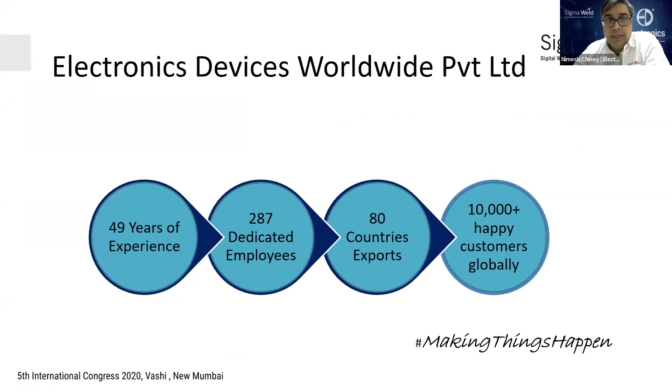I'll just give a little brief about Electronic Devices. We have 49 years of experience, 287 dedicated employees, with exports to more than 80 countries and 10,000 plus happy customers globally. With the motto of making things happen for our customers, we have our products categorized as induction heating, induction sealing, and welding and related automation.

Let's quickly get into the processes that are commonly used. I believe today's topic is more focused on infrastructure. In infrastructure, we use a lot of arc welding applications, MIG-MAG, and submerged arc welding. There are also new developments in laser welding, friction stir welding, plasma arc, PTA, and strip cladding, but these we will not be touching on today.

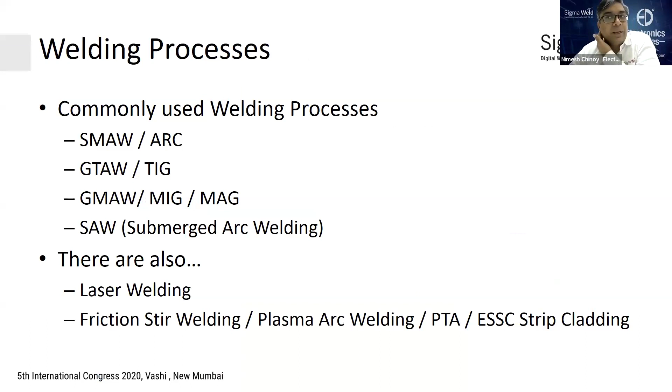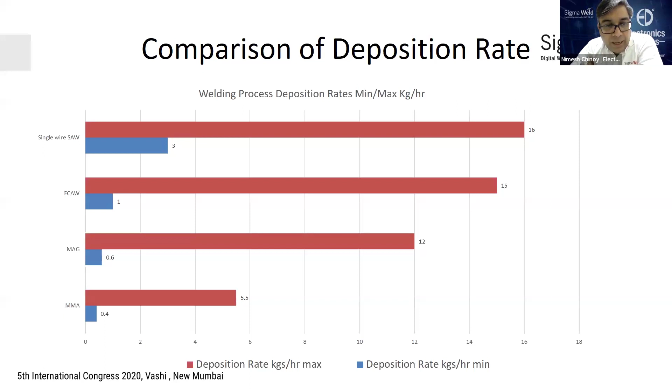If we quickly look at the deposition comparison of deposition rates for different processes, the highest among the standard processes is single wire submerged arc, ranging from 3 kgs per hour to about 16 kgs per hour. Flux core wire welding is 1 kg per hour to 15 kgs per hour. MIG-MAG goes from 600 grams per hour to about 12 kgs an hour. Arc welding, the most traditionally used, starts from 0.4, or 400 grams, to 5.5 kgs an hour. The most commonly used process is still arc welding even today in India and mostly globally as well.

If you want to increase productivity and efficiency in these equipments, you need man, machine, and consumable, all three to be improved. If you look at the man, arc welding needs a welder - it is rarely an automated process. It's a non-automated process. For slag removal and spatters, you need chipping and grinding.

You can improve this by upgrading to inverter-based machines from the traditional machines such as transformers and rectifiers. This will help reduce spatters and make cleaner slag removal. Also, energy saving is a bonus - you save close to about 30 to 60% energy if you move to inverter-based from the traditional equipment.

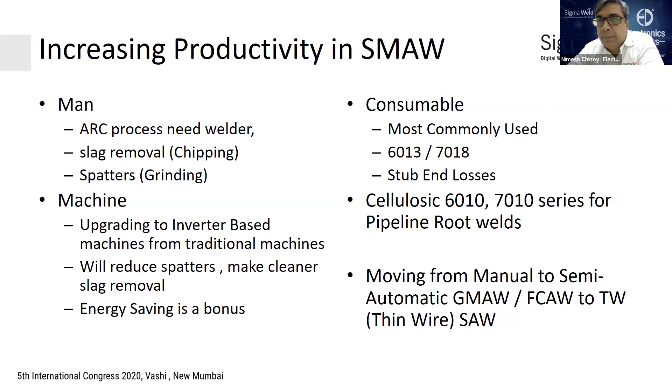Most commonly used electrodes are 6013, 7018, and for pipeline root welds, they use cellulosic electrodes such as 6010, 7010. If you're using arc welding, you can move over from manual to semi-automatic MIG-MAG, flux core wire, or thin wire SAW to increase your productivity and efficiency.

If you move from arc welding to MIG-MAG welding, the bottom first three electrodes - 7018, 6010, and low hydrogen - have deposit rates between 0.65 to 1.18 kgs. If you move upwards towards semi-automatic flux core welding and all the way up to automated MIG-MAG dual torch, you can go up to 7.5 kgs per hour. That's the progression depending on the job and your level of automation.

You can easily go from 600 grams to at least a semi-automatic flux core welding of about 2 kgs an hour, or a mechanized trolley to take it up to 2.5 kgs an hour.

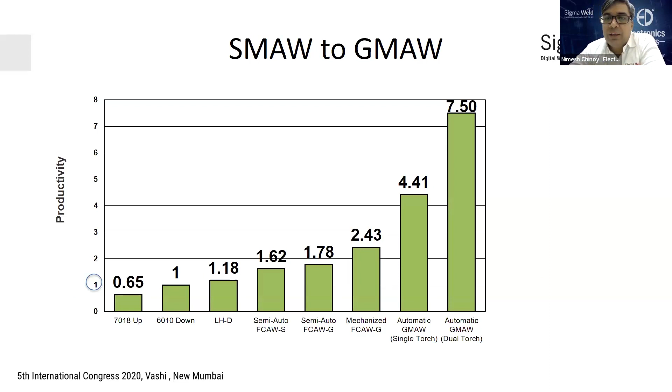When you move from arc to flux core, keep in mind you're moving from a manual process to a mechanized process. Your investment cost will be slightly higher compared to arc welding, but your metal recovery will be very high - that means per kg you pay, you will have more deposits, no stub losses. You can use gas-based or self-shielded wires, and it will mainly be used for filler and capping runs, whereas the basic root runs may still be done with arc welding or TIG welding.

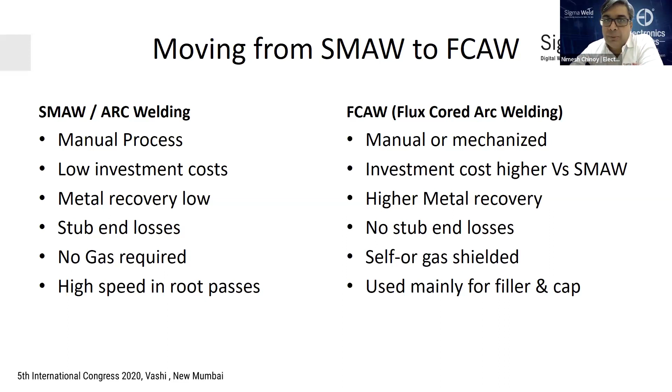That means less amount of material, more amount of throughput. So you can increase your ROI by 2.5 times, because the process is that much faster, with more metal per kg and per hour deposited, and the process can be easily mechanized. This is what an arc welding or flux core MIG welding machine looks like.

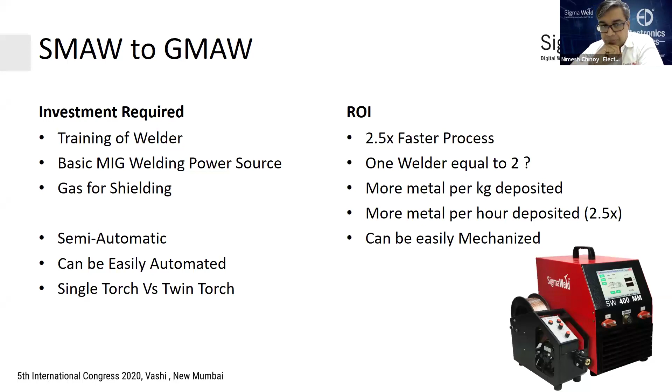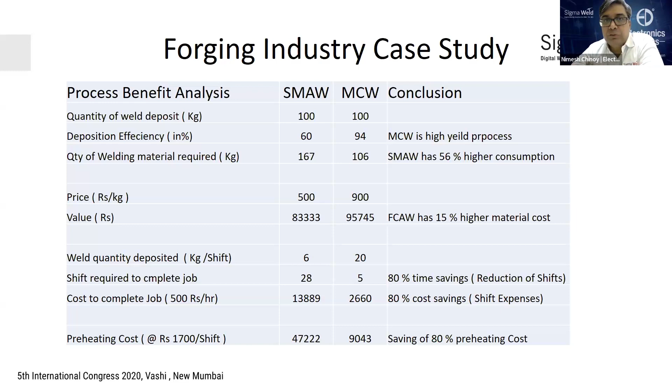You can go for single or twin wire, both. Just a comparison: per kg, you can see about 80% of preheating cost can be saved. And if you look at using metal cored wires, about 80% of time and cost saving happens. These are different figures used for the forging industry and die casting applications.

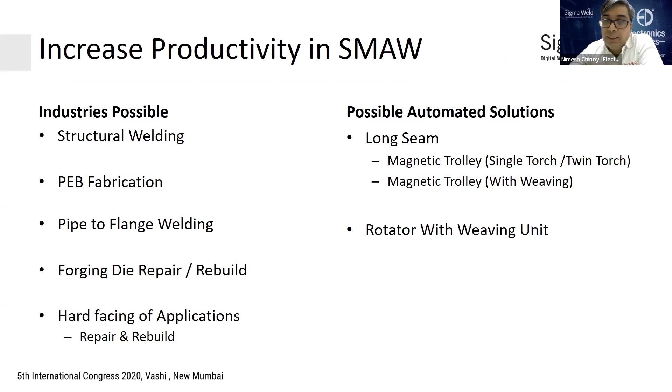If you wanted to increase productivity in arc welding, it is possible to do structural welding, PEB fabrication, pipe to flange, forging die repair, and hard facing applications. You can automate them by moving to MIG-MAG or flux core wires using magnetic trolleys and weaving units.

If you move from arc welding to thin wire submerged arc, you could increase your productivity very fast. This is very effective for low thickness, 5 to 15 millimeters, which is largely used in the infra sector for PEBs, girders and bridges. Speeds up to 7.5 times arc welding can be increased, and it's an already established procedure used in PEB, pre-engineered building applications of 10 to 12 mm thickness, and also in pressure vessels for fill and capping passes up to 5 to 10 millimeters.

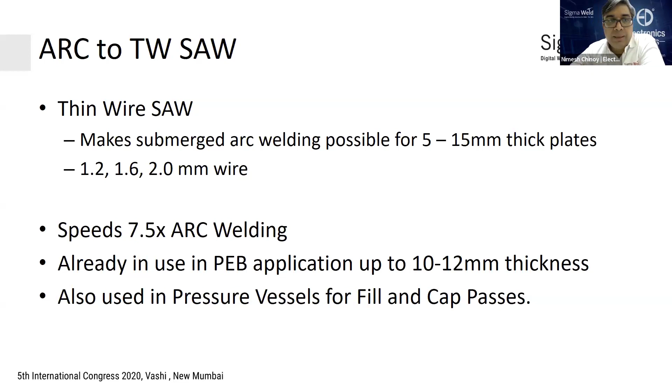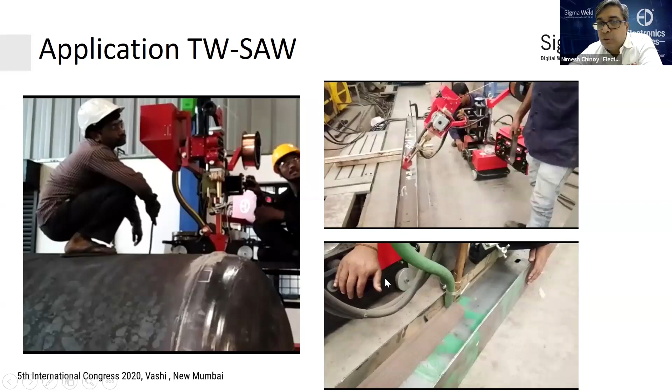Just a couple of photos and videos to show you how it looks. This is a 6 mm pressure vessel being welded using thin wire SAW. Here you can see small girders and flanges being made using thin wire SAW. The wire sizes are between 1.2 to 1.6, with specialized storages to reduce setup time.

SMAW productivity improvement, we've already discussed. From thin wire, your productivity increases 7.5 times, and it's very good for low thickness up to 15 mm plates.

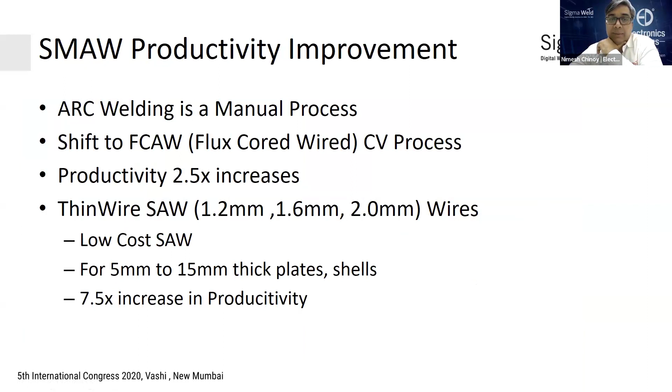Most popular process is MIG-MAG or GMAW welding, gas metal arc welding. It's widely used, extensively used in the automotive and heavy fabrication sectors. The advantages are very high speed, it can be easily automated, higher metal recovery, no stub-end losses. You can use self-shielded or gas-shielded wires, and you can also have narrow gap preparations.

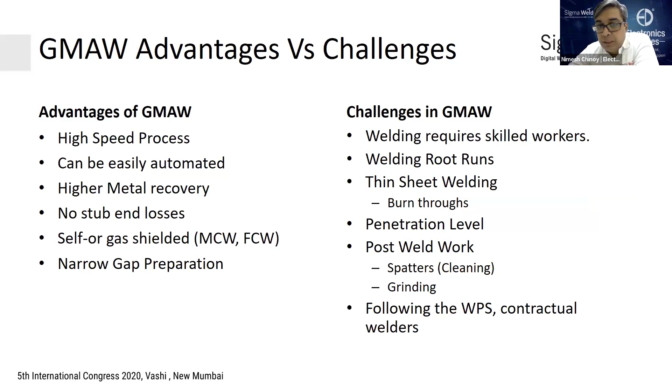Although the challenges, as also shared by Dr. Satish Sawant, are that it requires a lot of skilled welders, and availability of skilled workers is a challenge. Welding root runs are not permissible in pressure vessels using this process. Thin sheet welding can cause burn-throughs. Penetration levels need to be cross-verified, and post-weld spatter cleaning and grinding can be higher. Following WPS by contractual welders can always be a question mark.

To improve productivity, we can use high-end power sources, which are synergic, pulsed, and advanced, with 100% duty cycle. They're modular in nature and can give you inbuilt intelligence, IoT, etc. They're easier to train welders with, and low-skilled welders can perform better. More arcing hours per shift can be achieved if you move to high-end power sources.

Simpler automation such as rotators, headstock, tailstock, and semi-automatic parts can be welded using these. Long seamers are used with motorized slides and trolleys so that you can do smaller shells. As we saw, the flanges and girders can be welded with them.

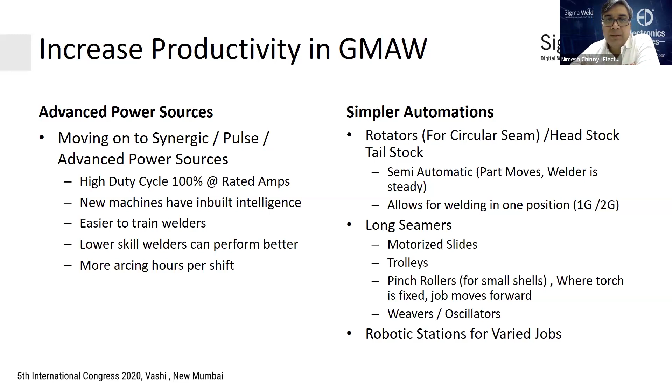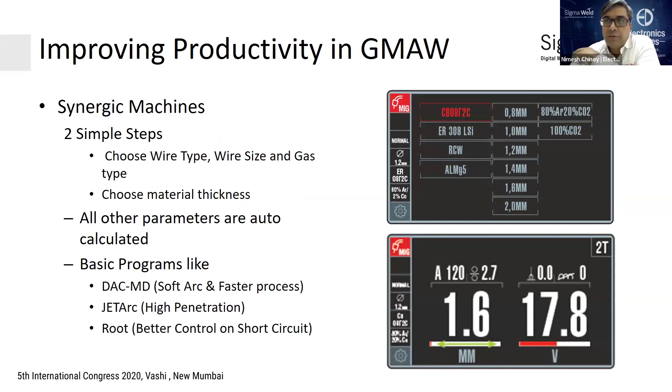Synergic machines have two basic steps. You can choose the material, the wire size, and the gas, and it will calculate all the other parameters for you, thereby taking away the skill from the welder and putting it right back into the equipment. You can have basic programs such as soft arc or faster process, which we call DAC-MD in the Pro series that Sigma Weld has. You have JETArc for very high penetration, and root for better short circuit control. We'll see a little more on that.

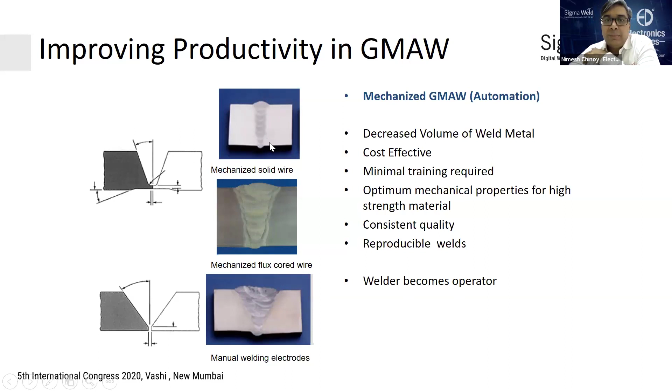If you look at this mechanized GMAW process, this is for a manual one - many passes, not very clean, you have to clean after each pass. If you go for mechanized flux cored wire, with a narrower groove, lesser material to be deposited, and fully mechanized, you can see the number of passes is reduced drastically - less passes, more weld deposit, and lesser cost overall.

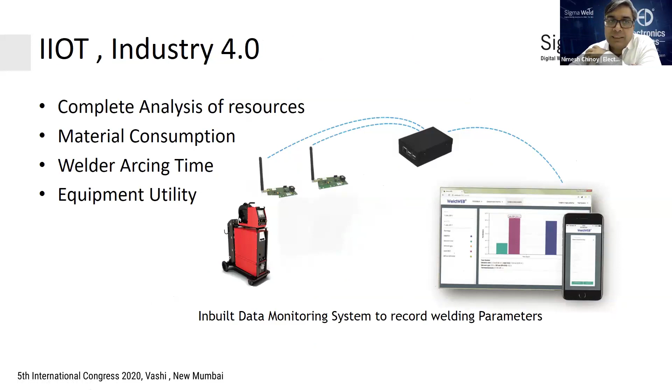Of course, there's a different talk altogether on IIoT and Industry 4.0 and how it can help you, but that's today a norm. We call it Weld Web, and we can give you a lot of analysis of data on that, which shows the productivity, efficiency, and consumption of resources utilized on the shop floor.

Root welding can also now be done with MIG welding instead of arc welding.

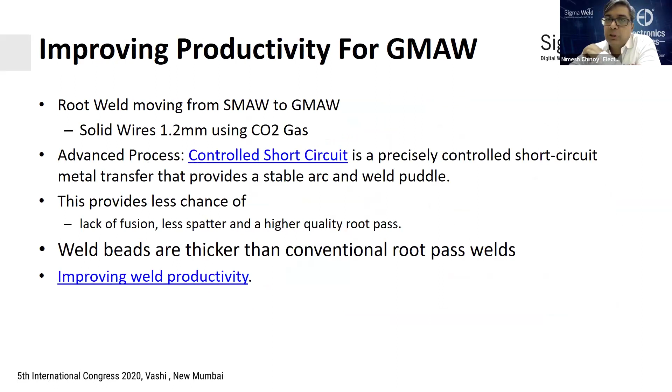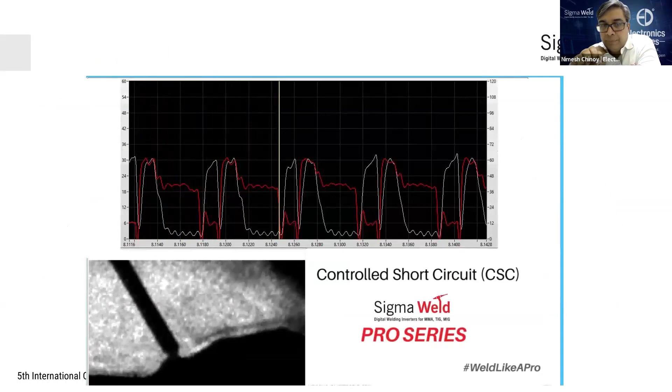This can help you with a lot of speed improvement. This is a proprietary software which allows you to have very high controlled short circuit. You can see the waveform and the deposit of the wire breaking is very smooth, with no spatters. Just a quick video to show you how this looks in real time.

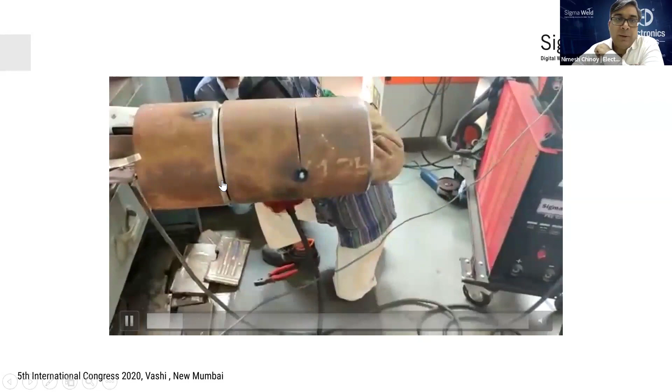This is a pipe with the root weld being welded by the welder. You can see the root gap is larger and the welder is directly welding the root through this process. This process has now been accepted in the pipeline industry and it saves a lot of time.

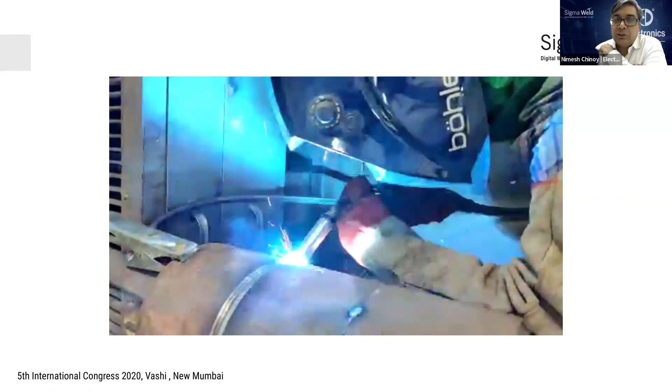It's ideally suited for root welding, consistent sidewall fusion, lesser weld spatters, tolerance to fit up conditions, also more tolerant to changes in stick out and tip to work distance, and the machine automatically accommodates for it. Lesser time to train personnel and thicker root passes to eliminate the hot pass.

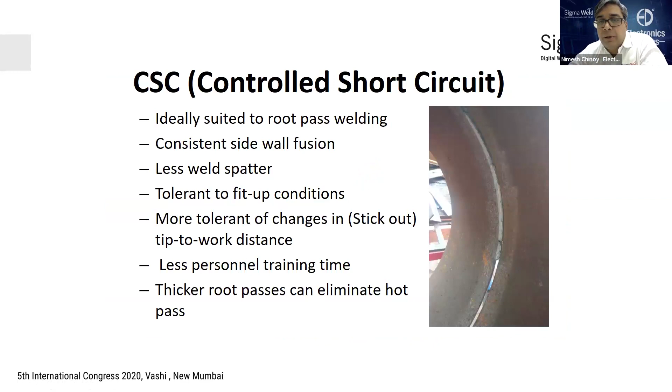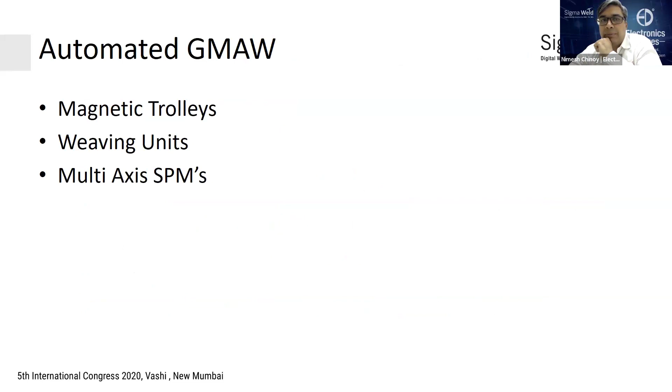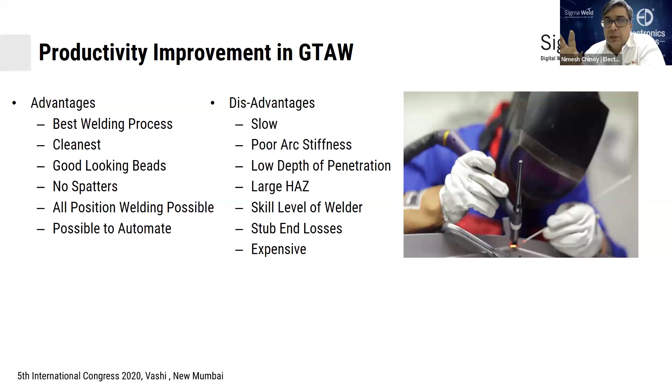However, it comes with inherent disadvantages of being slow, having poor arc stiffness, low depth of penetration, higher heat affected zone, and of course you need skilled welders. It can result in stub end losses. Due to all this, it's considered to be an expensive process.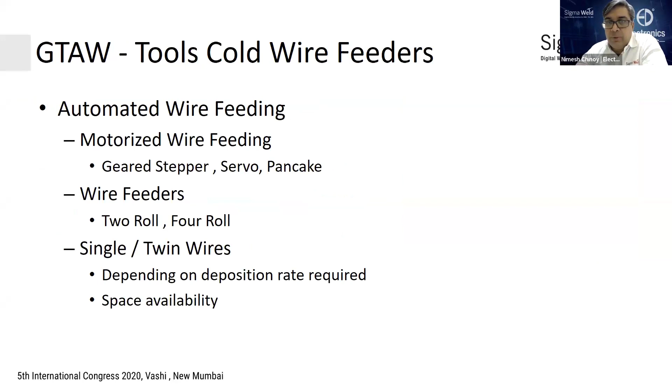However, there are tools that help you make this easier. You can go in for cold wire feeders, which are single wire or twin wire. They look something like this. They use a full spool. So you have 10% saving on material costs because you have that much less stub end losses.

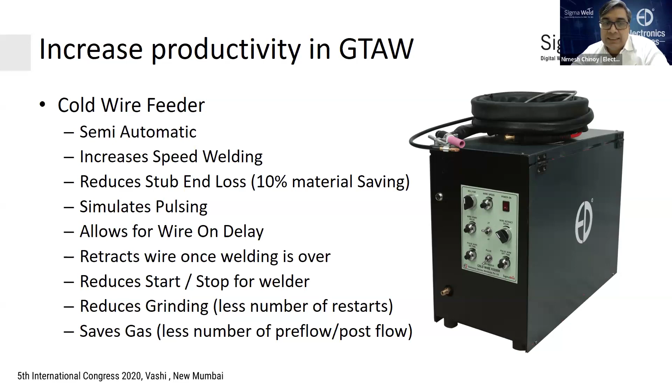You can increase your weld speed by up to 30 to 40%. And it allows a lot of - because there are less number of start stops, the number of grinding reduces, the amount of gas consumption reduces, and the operator convenience is much higher. The same operator can produce close to about 30 to 40% more speed.

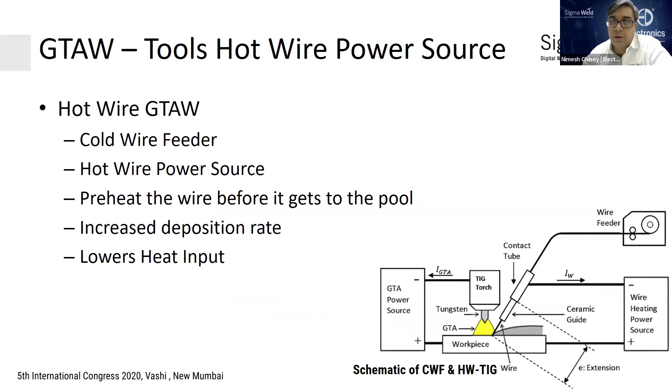You can even preheat the wire before welding - that's called hot wire TIG. And that can even help you with a lot of speed increase in semi-automatic as well as fully automatic solutions.

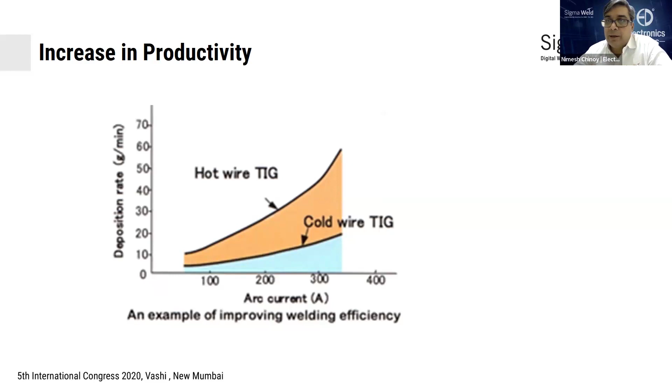Comparatively, the productivity that you can get with cold wire or hot wire - typically if you take a 200 ampere range, you're doing about 10 grams per minute, or about 600 grams per hour with cold wire. The same hot wire can give you close to about 1.8 kgs at the same current levels. So there's an increase in productivity while keeping the currents low.

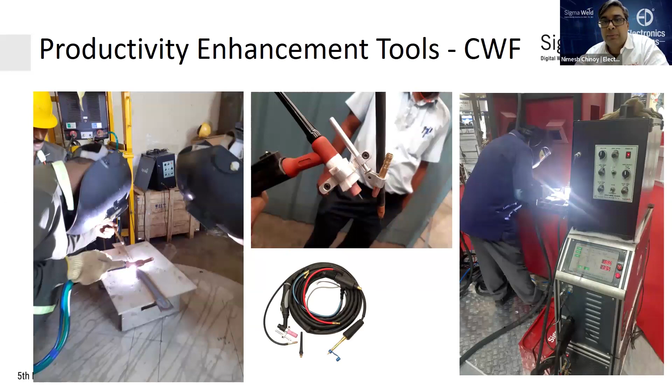You need not invest in a newer setup. It can be integrated with any old equipment, whether it's European, Indian, or an old machine - it can do the work. Here you can see the productivity improvement is close to 25% and time taken is reduced by about 27%.

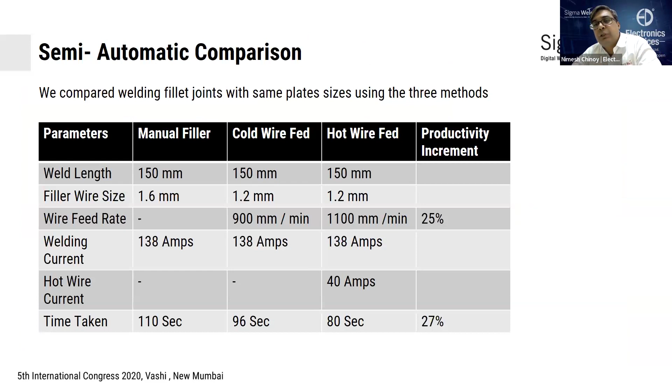You can also use twin wire, but this is usually used in automated setups. In those cases, if you use twin wire with hot wire power sources, you get 150% improvement in deposit rate.

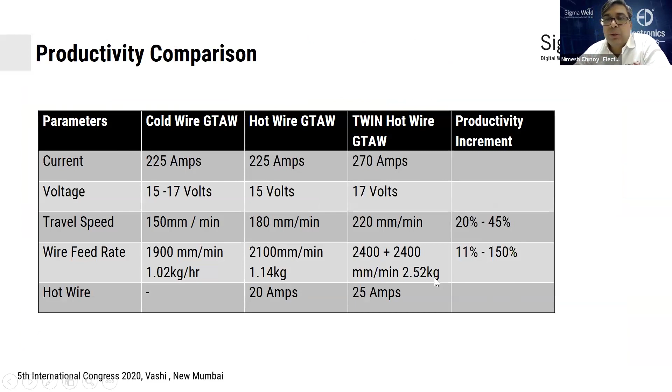This is something that you can use. It's largely used in cladding applications where a lot of material has to be deposited.

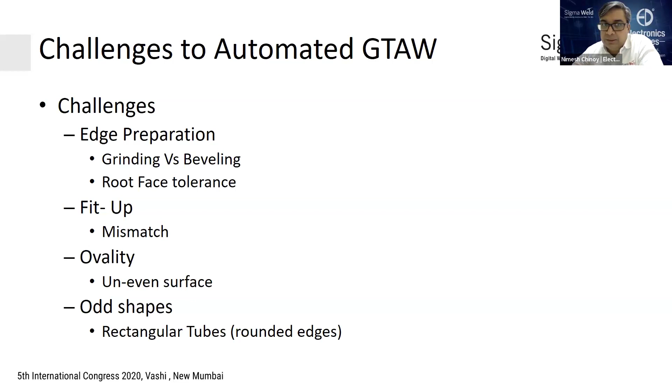Challenges to automate TIG welding include edge preparation issues, grinding versus beveling, root face tolerances, mismatch in fit ups, ovality, and odd shapes. These can be taken care of by using different kinds of weaving and oscillators, angular or straight.

Some videos, but I'll play them later.

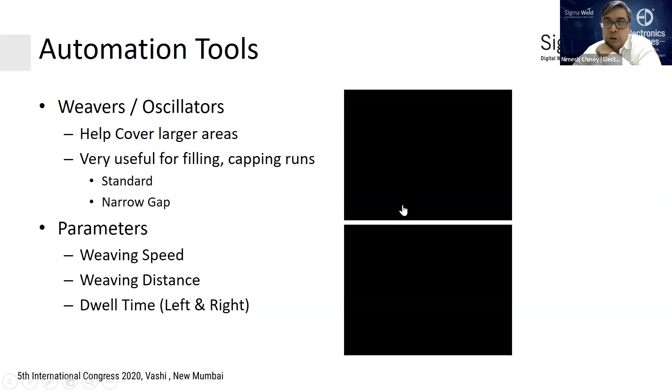You can also adjust the weaving speed, the dwell time on each end to avoid lack of fusion, and you can set the weaving distances.

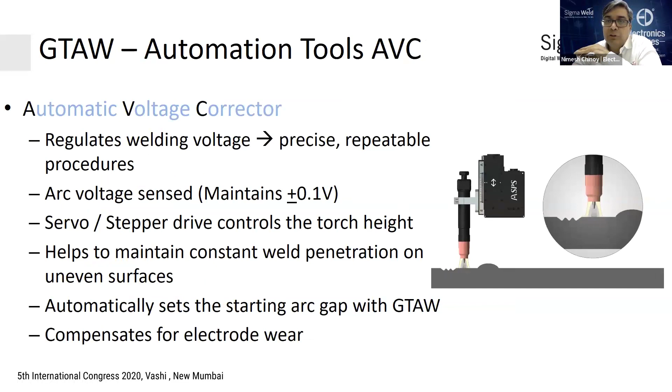Similarly, you can use something called an AVC, or automatic voltage corrector, which follows the path by controlling the voltage, and it allows you to have very clear results - irregular shapes can be managed by this as well.

Few examples of welding automation: you can do pipe to flange, pipe to pipe, long seam, stud seams, ID/OD welding. It's all possible if you mix these three together - cold wire feeder, hot wire feeder, AVC, and weaving. Multiple combinations can be done based on your exact requirement.

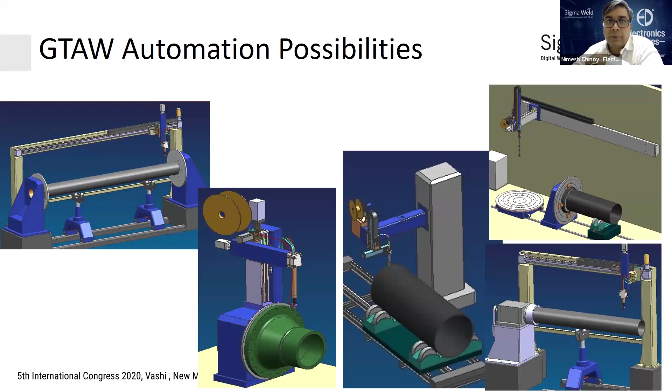Some of the examples you can see - the leftmost is an 8 millimeter pipe to pipe joint reduced to 2 passes. Here in the middle you can see large spooling which has been done. And on the right, we are proud to say this is the Chandrayaan 2, Chandrayaan 1, and Chandrayaan 3 outer solid fuel boosters which have been welded on a SigmaWeld setup.

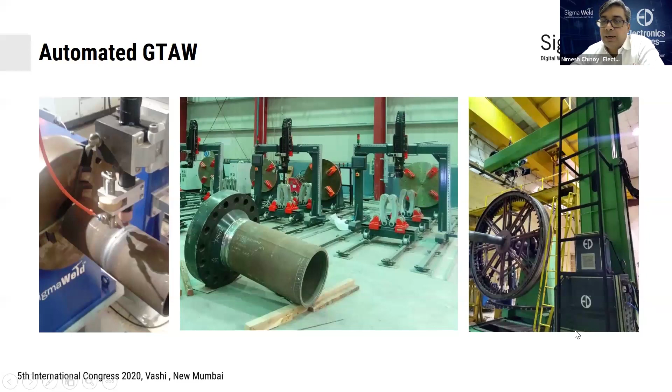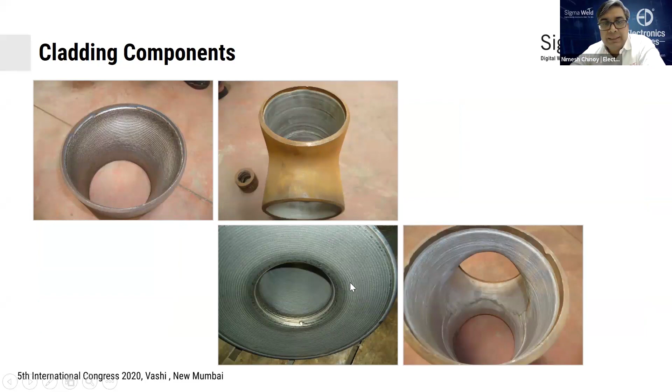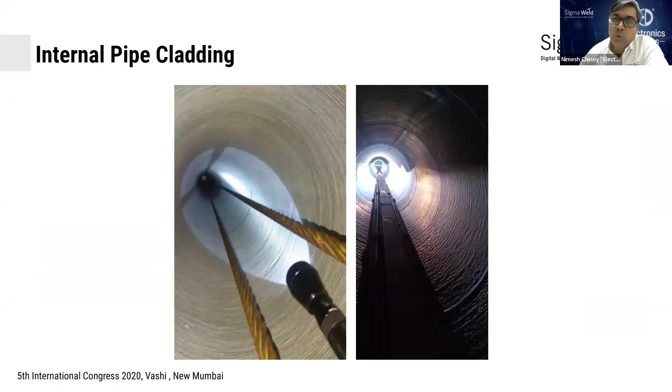Cladding components - if you had to overlay a component for oil and gas, you need to add Inconel, Monel, stainless steel, over carbon steel. These can be done in automated solutions using auto TIG, reducing a lot of time and giving you very good quality. These are 12-meter long pipes done with single head, twin head, or quad heads together. Again, TIG welding, very consistent deposit, and high productivity rates. There are a lot more examples for automated TIG welding, but if there's any specific one you need, we can discuss that.

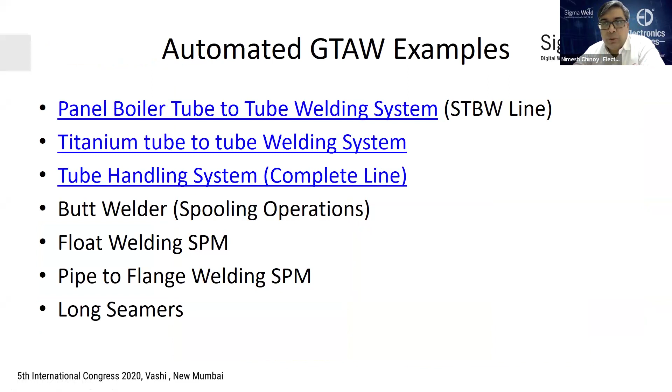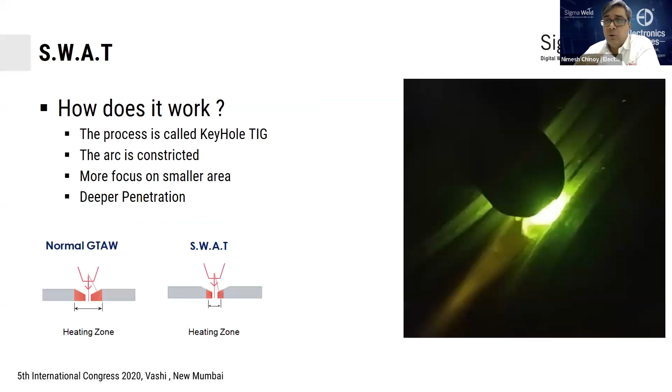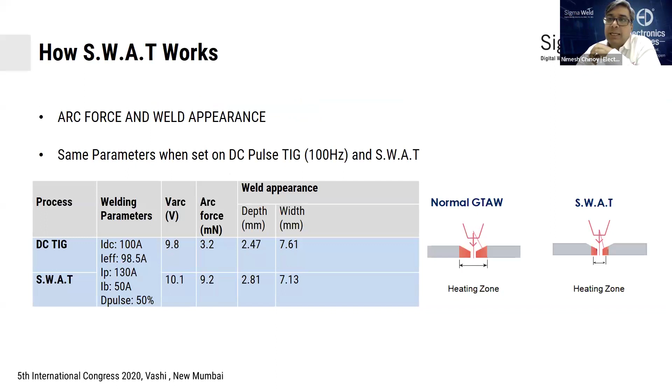Speeding up TIG to a different level, where you call it SWAT - Sigma Weld Accelerated TIG - wherein we create a keyhole, narrow the arc, and go deeper. The arc force, when you narrow the arc, is so high it's almost 3 times the regular TIG welding arc force. This allows for more than 20% more penetration.

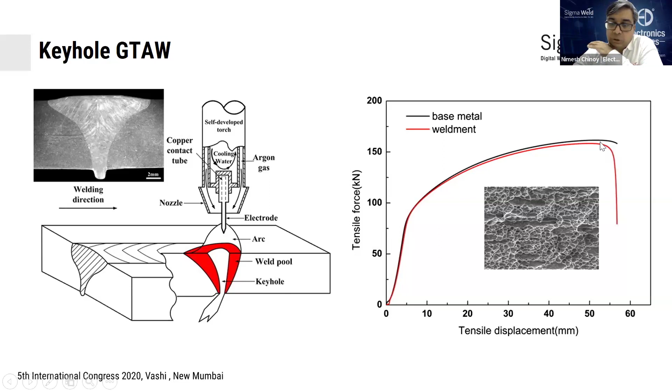You can have square butt welds up to 10 to 12 millimeters for materials such as stainless steel, low alloy steel, titanium, Hastelloy, difficult to weld alloys - you can do all of them. And since you don't use any filler wire, the base metal and the weldment have almost the same tensile strength. So very good welding quality, very high speed possibilities. It can be used for long seam, circular seam applications, and tube mill applications.

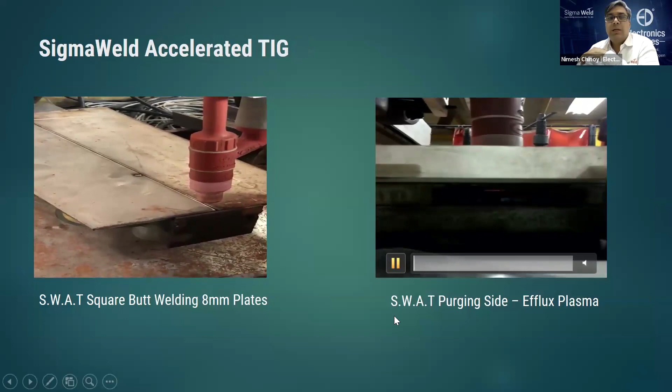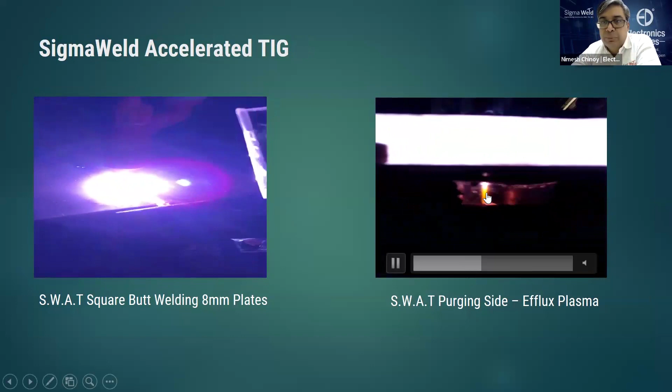So this is how it looks - basically you can see a square edge preparation, there is no V shape done. It's a regular TIG torch, but it's going to be mounted onto the SWAT mode. It will punch through the entire system in one go. You can see the efflux plasma exiting from the other end, which means there's a clean 100% penetration joint. And the welding speeds are upward of 400 millimeters a minute.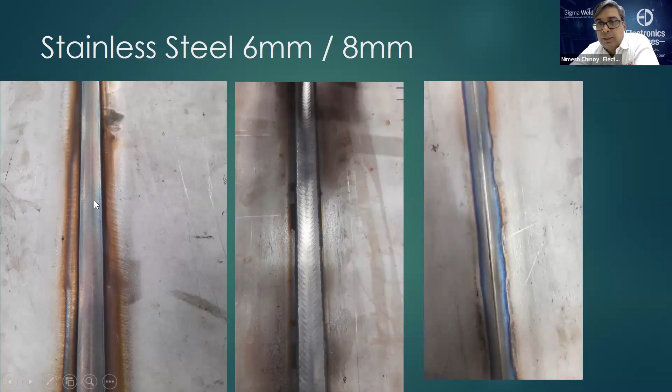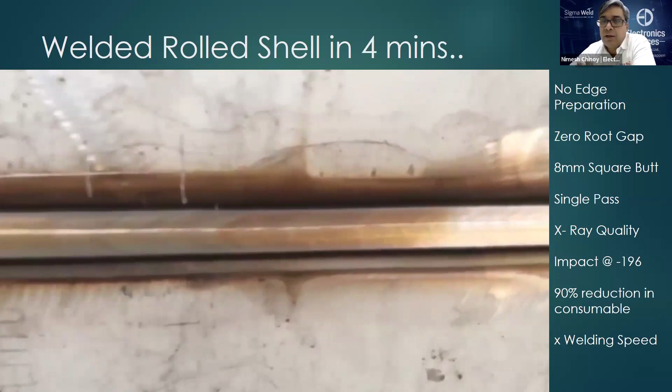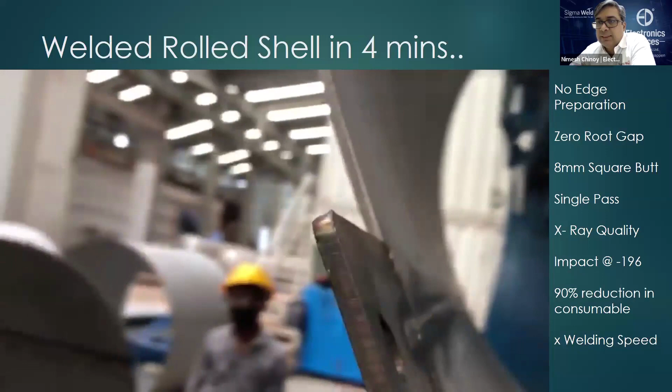And when we talk about efficiency, this rolled shell of about 1.6 meter length was welded in under 4 minutes. Typically, if you were doing this process manually, it was a one shift job - that is an 8-hour job. On automation, it takes close to about 1 hour, or at least half an hour with setup time and all. We've reduced the time for our customer to less than 4 minutes, and it's a 90% reduction in consumable, and it's an impact minus 196 tested joint.

So it's very high quality, no root pass required, no edge preparation required, and single pass welding. The increase in efficiency goes up to 83%. Filler material saved 90%. You don't have to clean weld passes, so you save 83% there. Weld edge preparation is not required, so 100% of that time is saved. About 60% gas is saved, and total cost per meter can be reduced by about 70 to 75%.

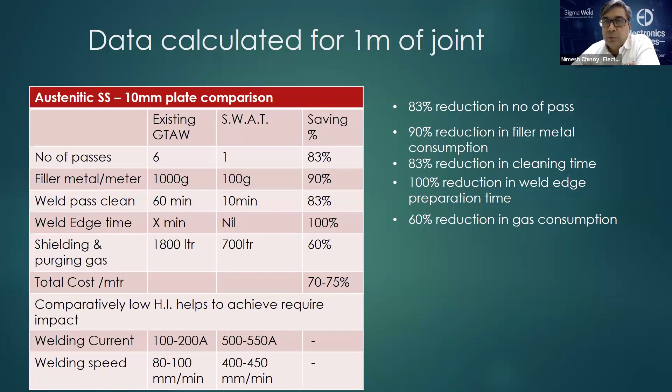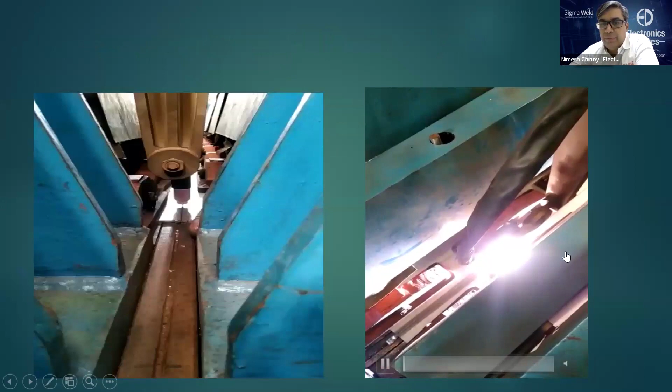This is extremely good for stainless steel, nickel alloys, and difficult to weld alloys. You can see for titanium as well, and this is for Hastelloy, 6 meter long shells. The live welding feed moves at about 418 or 420 millimeters a minute. And it passes all the requirements of ASME Section 9 as it qualifies as TIG welding.

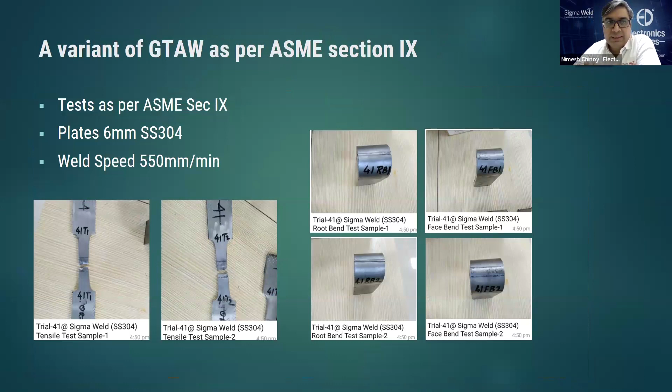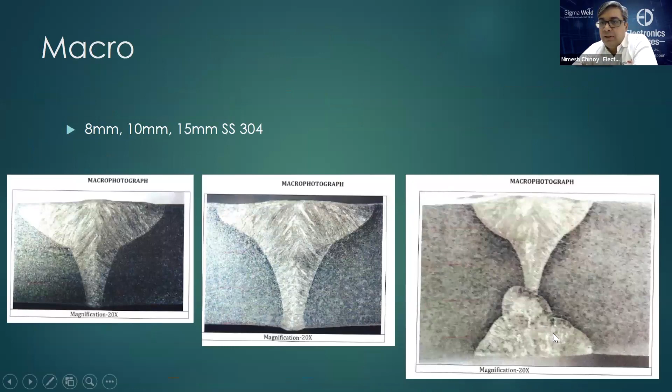Some of the macro graphs for 8, 10, and 15 millimeters - if you see, 10 millimeters is done in a single pass, 15 is done in 4 passes, 1 on the top, 3 on the bottom, total 4 passes. So that's all that I wanted to present on the speeding up of standard processes.